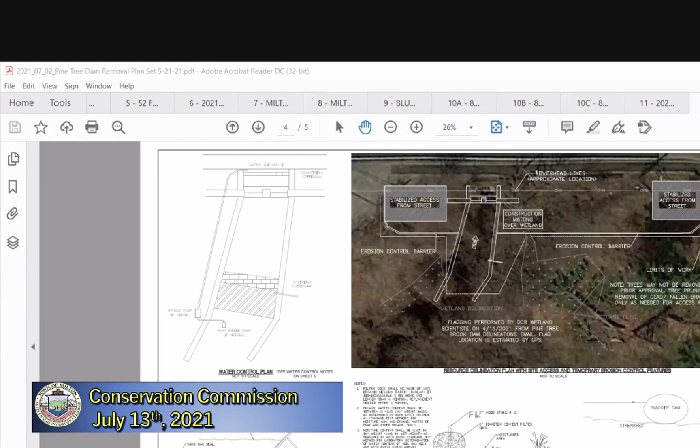In addition, because the DCR is going to contract this through state contractual mechanisms, they asked us, GZA, to put together a small plan set that would allow them to bring on a contractor, with plans and specifications defining access and the extent of the work. We've submitted those plans to the commission and would like to present them and request that the order of conditions be amended to include this. It's not an extensive set of plans, but it defines the work to be done and how it would be done under the supervision of the DCR.

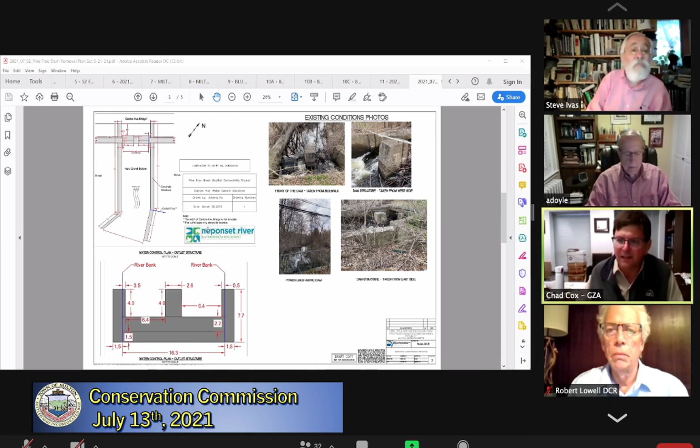I'm sharing the screen right now. Can you see that? Yes, sir, I can. Is that an appropriate place to start? Yeah, that's perfect. So the project is fundamentally unchanged since it was first brought before you. These are figures that were developed by the Neponset River Watershed Association.

This is the existing structure, and you can see some photos of it. It's really hard to call this a dam—it's more like a speed bump in the stream. With the boards out, it doesn't impound any water anymore, but it's still a barrier to the natural flow of water, and the substructure breaks up the natural stream bed and the aquatic substrate.

So we'd like to remove that. The one thing we've done is look at the structure and decide that in order to take out the bottom base slab, we want to do that while also maintaining the stability of the side walls of the channel, which we don't intend on altering. So we're going to ask the contractor to go about 1 foot in from each of the walls, inboard into the channel, and make a saw cut so that we can leave a little bit of concrete there to help stabilize those walls.

And then we'll break up the rest of the concrete, take that off-site, lawfully dispose of it, redistribute the sediment that's in the channel to backfill in the hole, and really be done with the project.

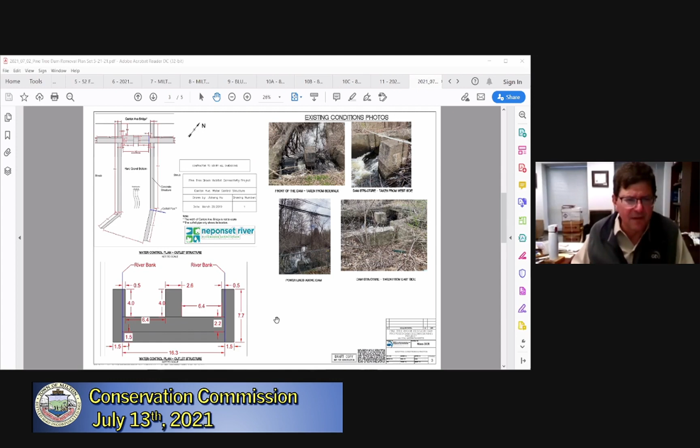And if we go to the next sheet... there we go, precisely. The photograph there with...

the white line types there just shows that we would have access from the street across the highway on both sides of the stream. And then we should be able to get in through there with just really light construction equipment on the left side, kind of as you're looking downstream, to help us break up the concrete.

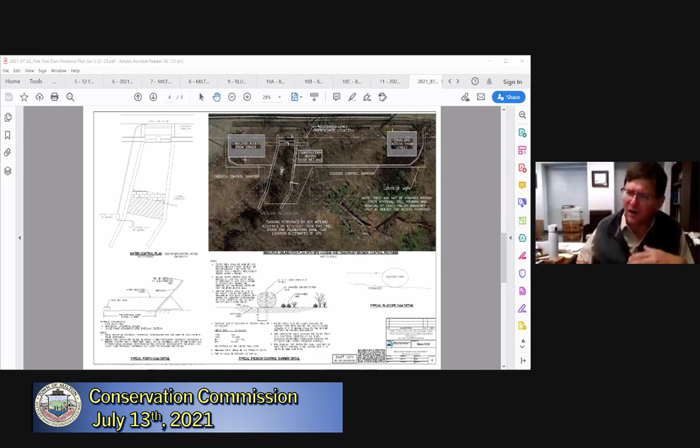One of the challenges that we have at this site is that there are overhead electric lines. So reaching in with equipment from the street or the sidewalk is problematic because we don't want to snag any of those electrical lines. So we'd like to get access from the sides.

So we've got a stabilized construction entrance on one side. We've got another one a little bit further along. That comes up and there's just a finger little bit of existing wetlands there. So we'll put some construction matting on that to make sure that we don't mess up anything there as we're temporarily accessing. There are some dead trees, some branches that we would prune, but we would expect to leave all live trees, any substantial live trees in place.

Reach in, set our water control first, because we'd like to do this work in the dry. We'd like to do it during the absolute dry season, at which point we think we can either pump the water in the stream around or perhaps even just temporarily get in and do our business. But we really feel like we're probably going to be pumping the water around, and we would do that by isolating the dam area upstream and downstream with a temporary cofferdam consisting of something that's not fill, not loose fill.

We would be allowing the contractor to select something like a porta-dam, which is the detail seen down there in the lower left, or a bladder dam, which I actually think would be pretty useful, which is the detail there in the lower right. That's just basically a big rubberized balloon that's filled with water and put across the stream, and it can do a good job of impounding several feet of water. That's really all we need.

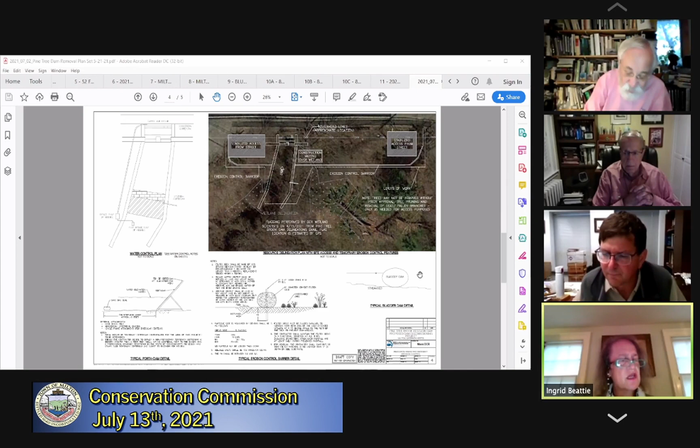Question, this is Ingrid. The photographs of the existing conditions, the one that said the caption dam structure taken from the west side — I know we've seen this site before, and I don't recall that much water going through it. It seemed like it was a whole lot less. Are these pictures taken with the boards in or all the boards out? And what time of year was that?

Yes, ma'am. My understanding is that all of the boards were out, and certainly substantially they were out. If there are any left, there's only minor boards left in. And these photos were taken earlier this year in May, I believe.

Okay, I bet if you took a look at it now, there'd be quite a bit of water going through there. Right, because of — am I remembering this incorrectly? I remember looking at this and it seemed like there was a whole lot less flow. Even when we did it, I think it was late summer. Yeah, okay, maybe that would certainly explain it. Yeah, it was quite a hot day.

And we certainly are intending to do the work. What we would like to do is do the work in absolutely the late summer, early fall, when flows are at their dead minimum. Yeah, that's what I was thinking — what's the volume of water going through there at any point in time? Okay, I understand.

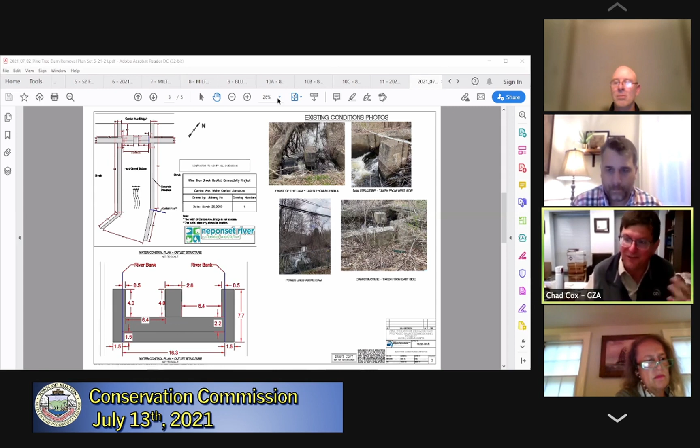I guess we would be open to something else, but we would specifically exclude both loose fill and sandbags. If I were a contractor, honestly, I'd want to put super sacks in the channel because I think that would be absolutely the easiest, but we're going to exclude that and ask for either the bladder dam or the porta dam. Perhaps somebody could come up with something clever like a steel plate on the downstream side, which might be useful for keeping the backwater out and not be fill, and be kind of easy to move in and out. We might be open to that, but we would specifically exclude both loose fill and sandbags.

Okay, perfect. Chad, I had a question for you. When we first addressed this, I guess it was actually 4 years ago now, one of the questions that came up was, when you remove the boards, what's going to be the impact on the Holland Street side going all the way back to Wollaston Golf Course? Because I know there were some questions about whether or not the ponds on the golf course would be lowered, and whether or not somebody was going to monitor that, is my memory. And I don't know whether or not it actually did lower the ponds, or if it's had any impact. Are you aware of any impact?

No, sir, I'm not. My understanding is the boards have been out for a substantial period of time. I'm sorry that I can't specifically speak to whether any monitoring's been done, but to the best of my knowledge, the DCR has not received any complaints about upstream impacts to this time.

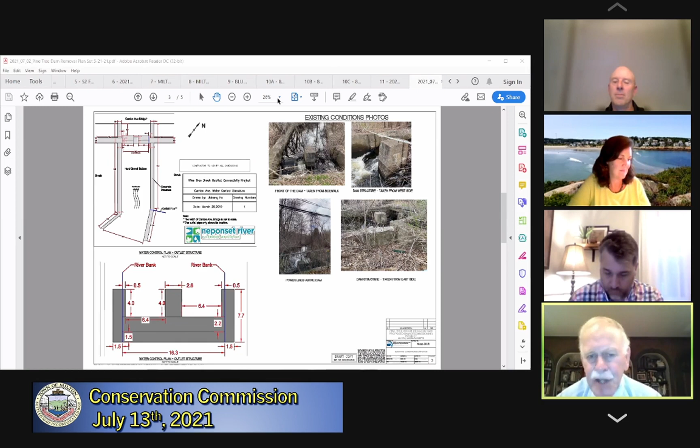Any other questions or comments? Hearing none, is there a motion to deem this to be a not significant change to the order of conditions? Aye. Thanks, Todd. Is there a second to that? Second. All right, any discussion? And all this means is it's not a significant change and we can move to, in a second motion, to approve the revisions. So the first one is been moved that it's not a significant change. That's been seconded. Is there any further discussion? Hearing none, all in favor say aye.

Aye. Aye. That's unanimous. Second motion that I'd entertain would be to issue a revised order of conditions as best summarized by Mr. Cox. And I'm hoping that Steve took notes on that. I did. As you always do. Thank you, Steve. All right, so is there a motion to make that revision to the order of conditions? So moved. Thanks, Arthur. Is there a second?

Is there any discussion about the motion that's been seconded? Hearing none, all in favor say aye. Aye. Aye. Unanimous again. Thank you very much. I appreciate it, and good luck with this, and we look forward to the completion of the project.

Thank you very much, commissioners. We appreciate it. All right, we appreciate your work. Thank you. Thank you. Have a good evening. Thank you. You take too care.

Number 3 on the agenda is notice of intent at 24 Wentworth Farm Road. And I believe this is one in which Todd Hamilton will recuse himself. Is that correct, Todd? Yes. All right, thank you very much. What's the best way? Can we, just call me on my phone, John, if you, all right, and thank you. I'll step back in. Thanks.

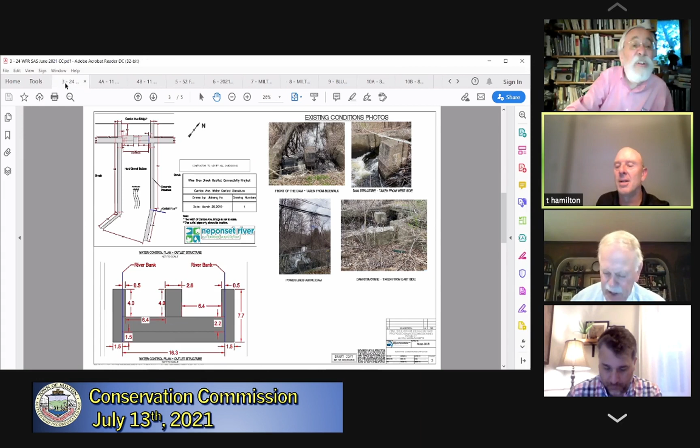Okay, you all set? Yep, we're all set to go. Hi, John. Good evening, everyone. My name is, for the record, Jeff Kane with LAL Engineering Group. I'm representing Jordan Storm for this notice of intent application for 24 Wentworth Farms Road.

We're getting to the end of the projects here. This is the last of the 2 lots that we'll be submitting notice of intents for. 24 Wentworth Farm Road is a 1.23 acre lot that's located at the end of Wentworth Farm cul-de-sac.

Steve, can you rotate that drawing at all? No, but I can zoom in. I think you can rotate in that. Yeah, can't you? I can't, I don't know how to rotate, sorry, okay, in this particular screen. Yeah, looking right there. Okay. So I can zoom in. How's that? Yeah, that's fine.

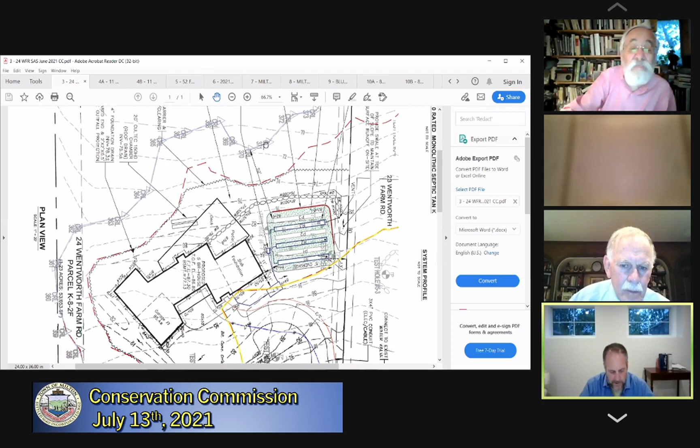That help? So the 24 has a wetland associated with the west and south portions of the parcel, as you can see in the plan here. The existing topography slopes from east to west from the cul-de-sac down to that BVW. And we'd be looking to locate or construct approximately a 4,000 square foot single family home with obviously a driveway and on-site Title V compliant septic system.

A little bit of numbers here, looking for disturbances. The proposed house, as I mentioned, is about 4,000 square feet. We'd be looking to put in about 8,400 square feet of impervious area over that entire lot. That does equate to about 16% lot coverage, which is significantly less than the zoning allowed 35% maximum. The buffer zone impacts we're looking at here is 15,000 square feet of permanent buffer zone disturbance, 5,000 of that which would be rendered impervious area.

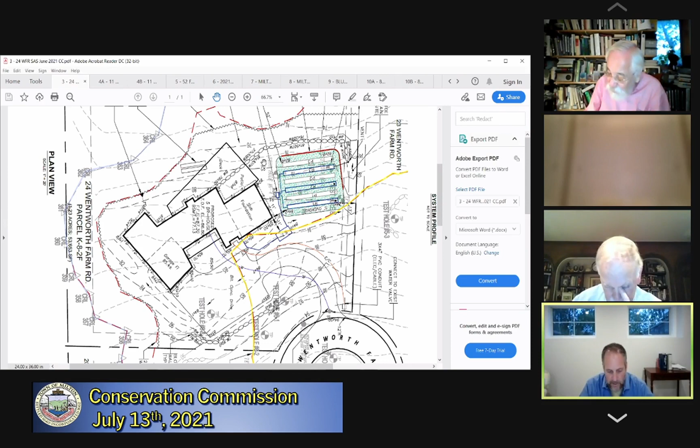All the work that we are proposing would be between the 25 and the 100 foot of the buffer zone. We are obviously respecting the 25 foot no-disturb on the parcel. And we are looking to infiltrate the first half-inch of water runoff over the roof into roof drains and into on-site infiltration galleries, which equates to the half-inch DEP stormwater quality volume.

One thing we'd like to point out is that we've mimicked, to the extent possible, what came out to about the same as the initial design we showed on the 2016 notice of intent for the subdivision. This lot always had constraints involving the topography and the way the wetlands sat, so there was only a certain size and shape house and driveway we could get on there. If you look back at the 2016 filing and the subdivision itself, you'll see that though the house shape has changed and the septic area has moved a little bit, the entire area of disturbance has really remained the same. So we tried to respect that when we did the project.

That said, as for the performance standards for the state and the town, how we've met the state standards: we're not doing any work within the actual BVW itself. We won't be doing any work within an estimated area of rare wildlife, and there'll be no work within an area of critical environmental concern.

As far as the town performance standards go, we have met the state performance standards for the first one. We are providing erosion and siltation protection during this project's duration. There will be no catch basins associated with the single family house. And the resource areas have been flagged, delineated, and just recently renewed—I think within the last few months—for the subdivision itself.

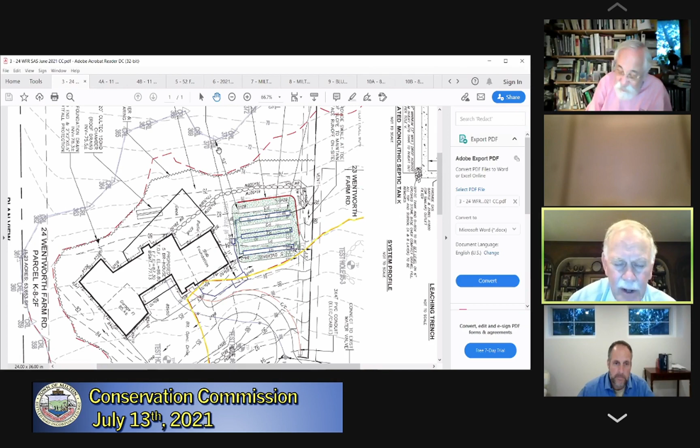I don't mean to pick on Wendy and Ingrid, but I defer to you in terms of your knowledge of shrubbery - would it be a good idea to plant shrubs along that line to maintain the demarcation? Do you have a view on that? I think it's always a great idea. I think shrubs have the natural ability of absorbing pollutants much more than lawn does, and also provide natural wildlife habitat and food and all kinds of good things.

I believe Jordan, you're on the call, right? That's right. Do you have any preference as far as putting shrubs up along that limit there? No, I mean, I would point out that that area is very wooded to begin with, so there's a lot of natural foliage and wildlife that comes up to that point. But we can certainly talk about it.

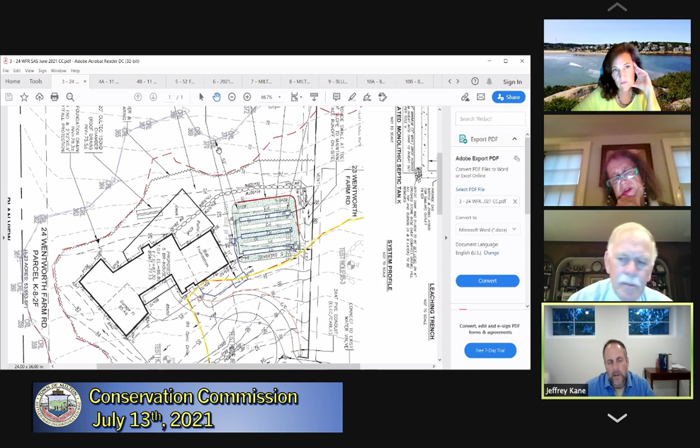This is Ingrid - what's the exposure, how much light does that area get? It's where the lot slopes back there, you're kind of coming down off of Highland, there's not a lot of light in that area. Pretty shady - that's what I was wondering. But that said, you've got the house going in, so I think that's going to change a little bit. Right, but you're not going to get full sun there, you're going to get a mix - not full sun, but definitely not full shade either.

So there's the north arrow right there. Okay, right, so you can see it's got a westerly-southerly exposure, except for early morning when the house higher in elevation would take care of that, because you're at kind of the bottom of a hill there, obviously with the wetlands right there. So there's not quite the amount of sun you're going to get on a typical southern exposure because you don't have all cleared land behind you.

My only reason for bringing it up is that, for the applicant's benefit, Mr. Strom, we sometimes are confronted with landscape lawn creep. It tends to go further and further towards the wetlands and sometimes into the wetlands. That's why I brought up the question, but I thought Wendy and Ingrid would have some view, and I didn't mean to exclude Arthur, Hans, and Todd as well. What's your view on planting some shrubs? Whether or not they'd survive is a good point, Ingrid, regarding what the exposure is. I don't know whether they would even survive if we asked the applicant to plant some shrubs along there, just to maintain that line.

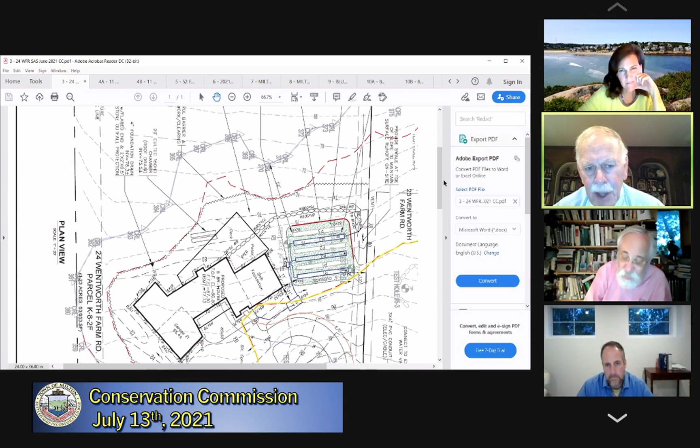Have we required this for any other property? Yes, we have, but not in this specific subdivision - it was other properties, Hans. So how many of the other houses in the subdivision have been constructed already? One's been fully constructed, and there are 3 or 4 under construction right now. The shrubs haven't been specified.

I am aware of your concern with the creep, as you call it, John. I want to mention that flat area - usually the creep involves usable lawn. Talking with the owner, Jordan, he wanted an area for the kids to play that was flat. The area behind the house isn't really conducive to that, that's why we had that flat area over the septic system, which is a decent size. We have a retaining wall that allows that to be a more flat, usable play space. I think the area behind there is more of a gateway up to the end of the property, less an area that's going to be utilized for useful activities.

I would agree with that, Jeff. It drops quite rapidly down to a stone wall - is that correct, as I remember? On the backside there is a stone wall, not on that side. Yeah, and there's one there as well. You're going to see that one on the western side, right? Exactly. So in this one here, this lot itself really hasn't changed a lot since day one because we knew it had some issues with it.

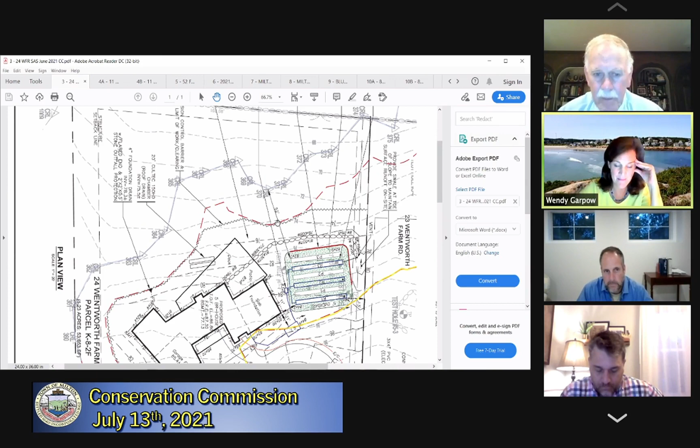I love the idea of the shrubs, John, and I think you're absolutely right drawing from the experience with the other property you mentioned. I don't think there's any harm in having some kind of delineation just to prevent the possibility of lawn creep. No, I absolutely agree. Something native, like blueberries, hopefully the homeowner would be amenable to something like that. It's certainly also a perk for kids, a fun thing to do - a low, intermittent hedge that demarcates the line. Does that make sense?

I would agree entirely, Ingrid. I don't think the blueberries are gonna last long. Well, that's the reason I asked the question in terms of exposure - how much light, and is there enough light there to sustain something like that? Yeah, I'd just be more concerned with the deer.

That too, and birds for the blueberries frankly. If they're native wild blueberries, they're less susceptible to being devastated by deer, and they do relatively well in shady areas at times, more so than the cultivated ones for sure. Now, you can't do anything cultivated with the deer in that area.

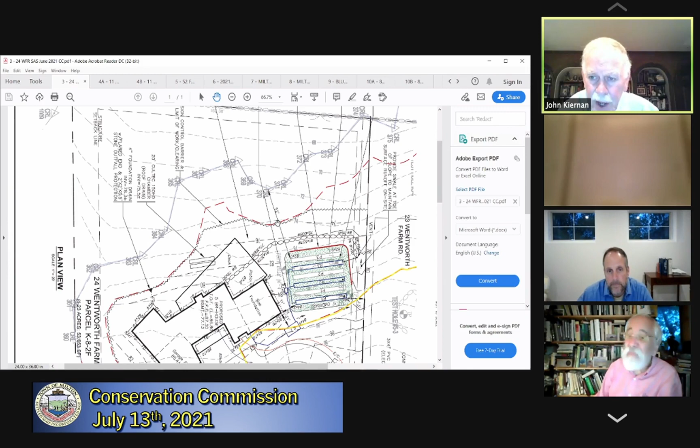I'm going to have to defer to others on 20 feet, 15 feet, 25 feet. I'm not hung up on how far apart they are, but I think it could be done in such a way that it beautifies the area or protects the resource. I think this is an opportunity to make everybody happy. I just don't have the exact number in mind. If anybody could help me out, 20 feet is okay with me. If somebody said 15, I'd be okay. If somebody said 25, I'd be okay with it.

Steve, do you have any experience in terms of the distance apart? Well, if it's 20 feet apart, if indeed the shrubs continue to grow in that area, you won't be able to see them. However, if things are mowed or deer chewed, you'll be able to see them very easily at 20 feet apart.

It depends on how well the forest grows back in, John. Looking at that spot recently, it looks like it's not a high nutrient area, so things will probably not grow in very fast. That's my guess. Would you agree with that, Jeff?

If it's a native plant and it gets the light it needs, it will grow in. Oh yes, the natives will, but not right now. Nothing else will grow besides those specific plants. So what I'm saying is the deer will be able to find them if they go after them. Deer don't go after arrowwood very much, nor do they go after the sweet pepper bush very much either.

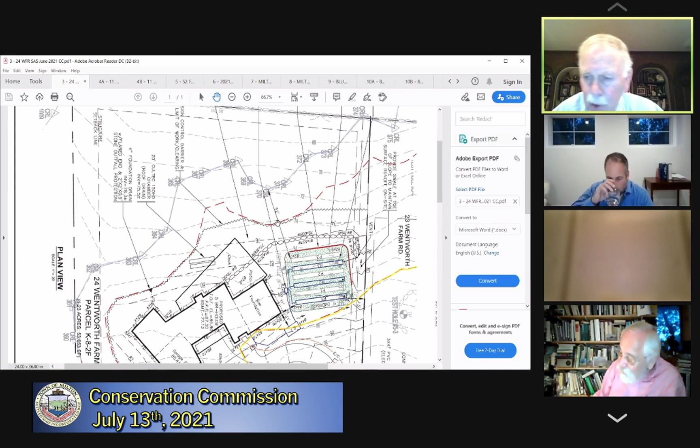Hearing none, is there a motion to issue an order of conditions with the special conditions of the plantings along the 25-foot demarcation with a maximum dispersement of 20 feet, and the planting shall be native species of shrubbery. Did I summarize that correctly? Yes, so moved. Second. Is there any discussion? Hearing none, all in favor, say aye. Aye. Aye. Good. Thank you.

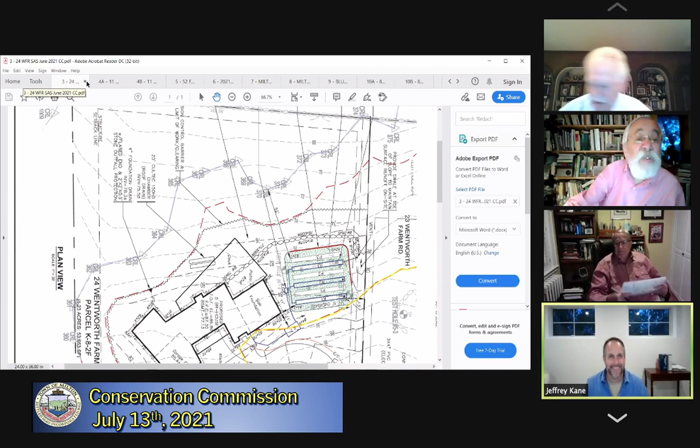Thanks all, nice presentation as usual, Jeff. Thank you, very well done document. Don't say it too soon, Arthur, he's got another one coming up. Keep that thought, Arthur, keep it. I take them one at a time, Steve. Exactly, okay, there you go.

All right, number 4 on the agenda is amendment of order of conditions, 11 Wentworth Farm.

Let me just jump on that one, 11 Wentworth Farm. Jeff, I have the original up, and I can show the other one as well. Would you like to see any particular one? Original, maybe? No, I think we just start. Let me just—I'm sure you guys read the letter, but I'll just give you a quick synopsis.

We received an order of conditions for this lot, 11 Wentworth Farm Road, with the intent the owner was going to build a spec house. In the interim, that lot was sold. The new owners want to put up a house with a slightly different footprint. As we outlined in the letter, the disturbances on the lot, nothing really changes. The house shape got squeezed down and extended forward.

If you look at the original to the new one, it's really the same square footage, just a slightly different shape. As far as the jurisdictional area goes, the disturbances are almost the same. It's just the impervious area has gotten a little bit less. Beyond that, everything else is the same.

We felt instead of just doing this as an as-built—and no one probably ever would have noticed the change in footprint—since this was a new owner, we wanted to have some type of permit in place that let him say, hey, you have the right to go forward with conservation to do this. So we wanted to put through a request to amend the order of conditions, so we'll have the actual site plan with the actual building footprint on it.

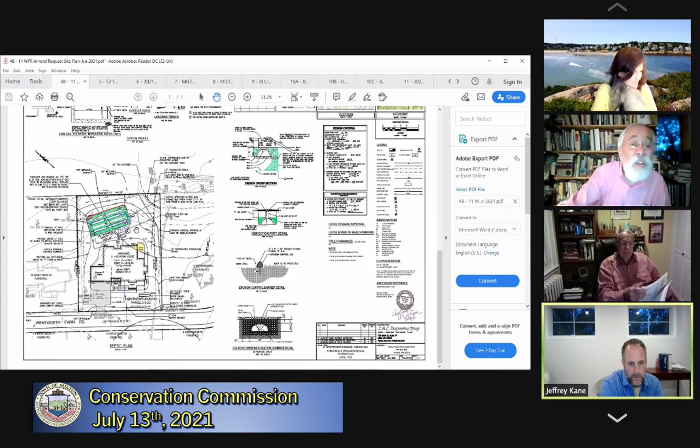So if there's any questions, let's show the original versus the new plan. You can see that highlighted area, the concrete patio, right there. I'll zoom in on it a little more.

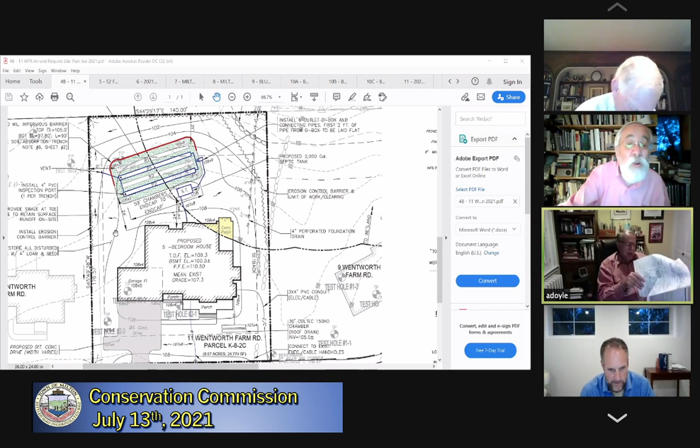Is that the new one? I thought I had another one up called 4A. Let me scroll down to see the date on the drawing. On the original plan, the concrete patio was much larger, and the house footprint was longer and a little narrower.

On the proposed one, it's not quite as long but a little fatter, and the concrete patio actually gets a little bit smaller.

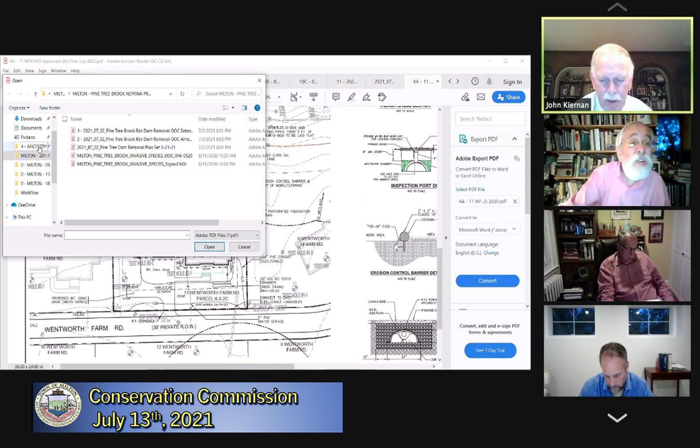This would require two votes: one as to whether or not it's a significant change. If it is, it would require another notice of intent. If not, we could then consider whether to approve the revisions.

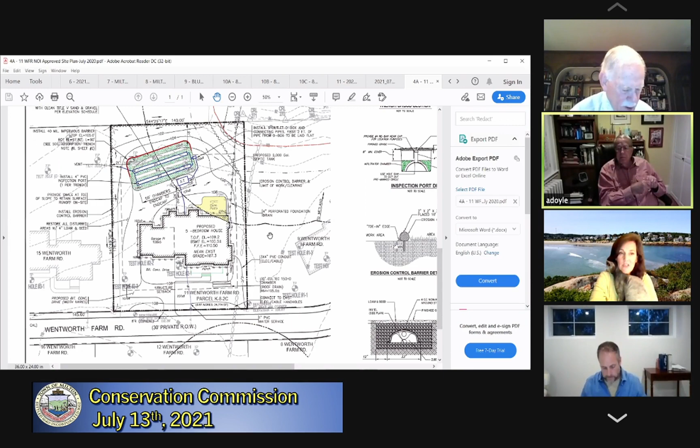It seems to me that you've reduced the impervious surface, correct? Yes, that's right, John, by about 200 square feet. And it also looks like you've taken a piece of the structure out of the buffer. Yeah, just a little bit, but that impervious area does change, be it roof or concrete.

I don't see this as a significant change. Nor do I, but I don't know whether anybody else does. Arthur, did you have a question? No, I was just saying I agree with John.

Are there abutters or members of the public who have a question or wish to make a statement? Hearing none, is there a motion — remember, we've got two motions. The first would be that this be deemed not a significant revision. So moved.

Is there a second? Second. Any discussion on this? Hearing none, all in favor say aye, meaning it would be not a significant change. Aye. That was a unanimous vote.

The next vote would be whether to adopt the revision as the applicant has requested. Is there a motion to accept these revisions? So moved. Is there a second? Second. Any discussion? Hearing none, all in favor say aye. Aye.

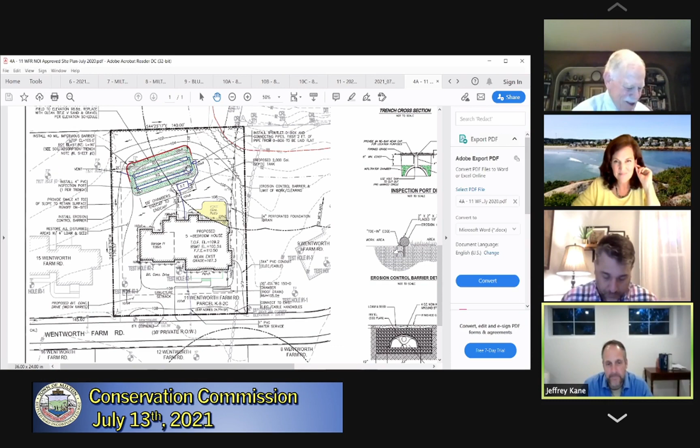All right, but wait, there's more. Next on the agenda is number 5, request for certificate of compliance at 52 Ford Ranch Road.

But before you start on that, let me just reach out for Todd if I can. I'm back. Oh, you're back. There you are. Thanks.

52 Ford Ranch Road, is that Jeff? We've got you again. Yeah, that's me again, John. This one's pretty straightforward. We had a septic system repair at 52 Ford Ranch. I don't know if you remember that walkthrough, a real tight site behind the house, right up against the wetlands.

Failed septic system — we put in a new alternative technology septic system, supposed to provide advanced treatment of that effluent being so close to the wetland. At this point, we're just looking for a certificate of compliance. There was no new disturbance area, just a regrading of the lawn that was already there and replacement of the system. We did place, as you'll notice on the plan, some shrubbery along the edge of that wetland, per a prior request.

Those were all put in, pretty much grouped as they appear on the drawing. The landscaper just followed what was there and put them in the same groupings. So we're just looking to get the certificate of compliance and close out the project.

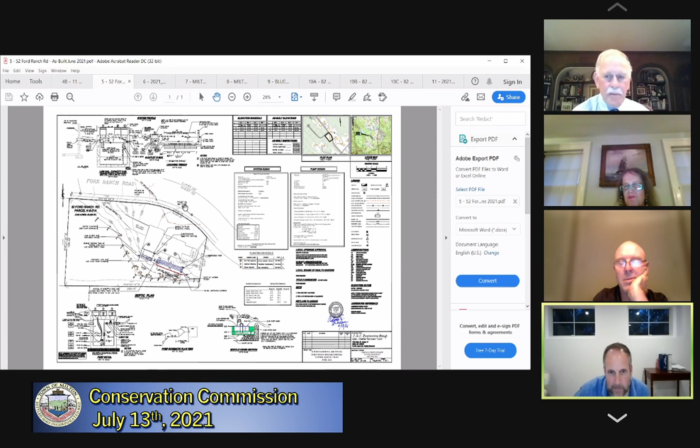All right, how long have they been in the ground? The shrubbery I'm referring to, Jeff. It was this spring, John, was that? Let me see, I think they put them in last year, just trying to remember. Yeah, if it was spring, or we went out there in November. I get these as-builts running together. Right up there, Steve, there's an as-built inspections date, if you go up there you'll see it. Okay, hang on a sec.

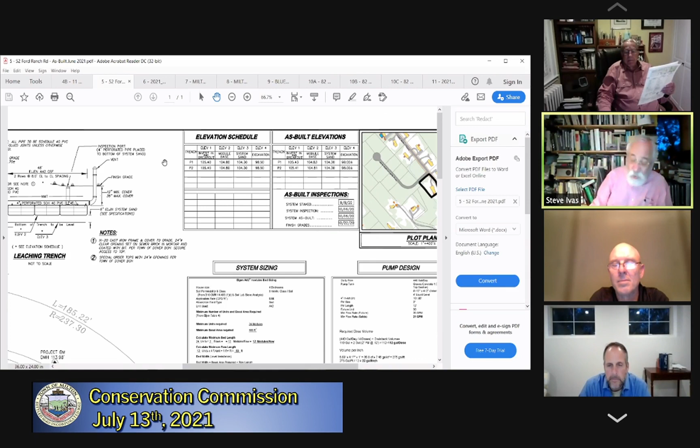The grass was in last fall. Yes, it was, I drove by about three weeks ago and it really looked good. So I think they were probably put in, and we inspected them in October, though it was probably put in like September or August when they were actually planted. It looked good, very good. Yeah, it's so lush back there, it's so close to the wetlands. I won't call it a river because we never determined what it was, but it's so close to that. It's just a great spot for growing, and they're doing great.

All right, and for the record, we do have the certification that the work was completed in substantial compliance with the plans, which is critical for us. Are there any questions or comments from commissioners? Are there any comments or questions from abutters or members of the public? Hearing none, is there a motion to issue a certificate of compliance?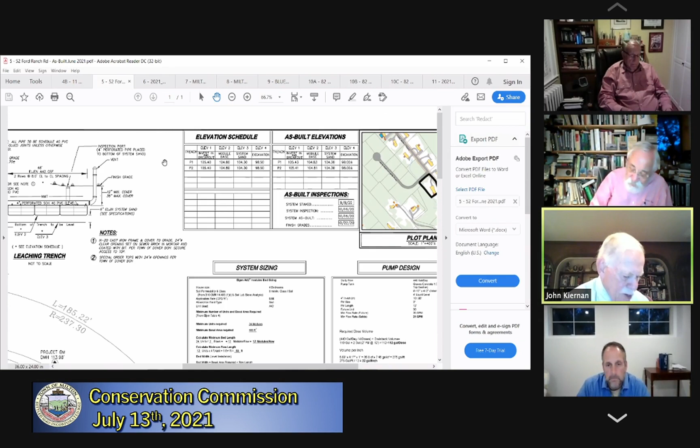I'll move to issue the certificate of compliance. Thank you, Arthur. I'll second it. Any discussion? Hearing none, all in favor say aye. Aye, aye, aye. Great, thank you very much.

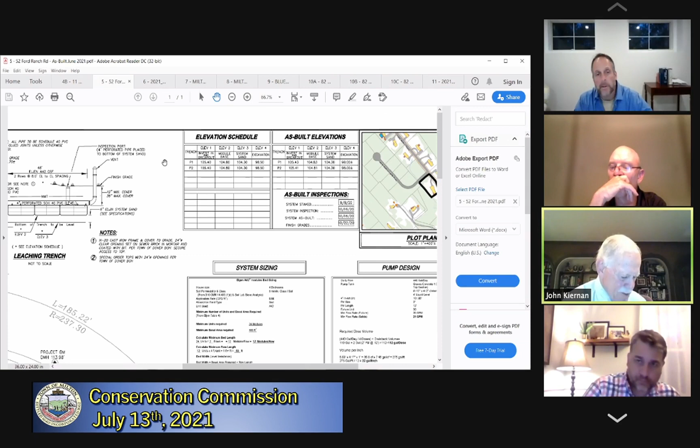Ladies and gentlemen, thank you very much for your time as always. Take care. Oh good, thanks. Take care. Thank you, Jeff.

Okay, next on the agenda is number 6, notice of intent for 101 Neponset Valley Parkway.

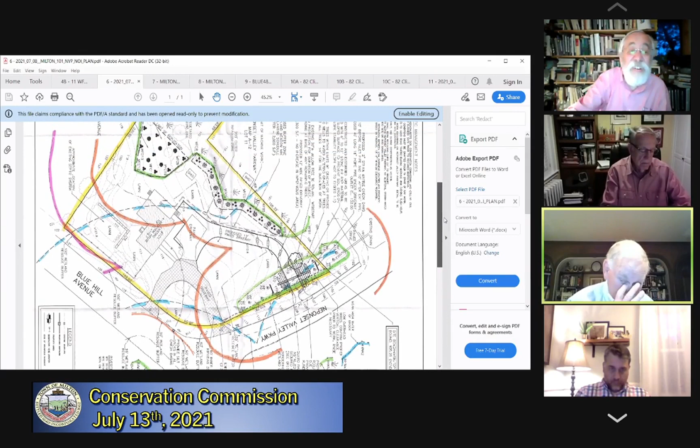Good evening, can you guys hear me tonight? Yes, thank you, good evening. How are we? Do you want me to give an intro? If you could give us an intro, that'd be great. For the record, my name is Peter Lyons with Collins Civil Engineering Group. I'm on tonight with the property owner, Mr. Niels Krejci, regarding a driveway relocation project. I believe most of the commission is familiar with the project, we walked it maybe a month or two ago.

The main purpose of the project is to eliminate the existing driveway at the intersection of Neponset Valley Parkway and Blue Hill Avenue. I think anyone who's been there will agree it's a very dangerous intersection, not only for whoever's at the house, but for whoever's trying to navigate the intersection. There's very commonly traffic jams there, so it's a major safety concern. That's our basis for this project.

So what we're contending with is sort of a wetland created by the drainage system of the Neponset Valley Parkway. It's pretty much intercepting the groundwater and running it off towards the north, I guess, which would be to the right on this page. To the right would be west, I think, just a guess, but let's take a look. To the north, you're right. Here we go. Okay, Peter, you're right.

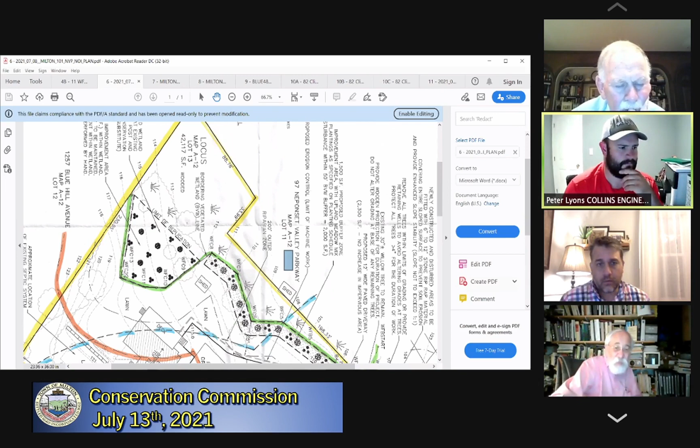Well, I don't know, just brainstorming here. It looks like it's doable. But you have to get the hydrology to cooperate. Exactly. But that whole connection between C6 and C12 or C10 might work.

All right, well, again, it's my view that we don't really have the discretion that you're looking for unless we get some kind of replication and creation of new wetlands. But we support the project. I know the driveway in its current location looks like a disaster waiting to happen. So we'll continue to work with you, but I think you've got to put it into an area where we can exercise that discretion to support the plan.

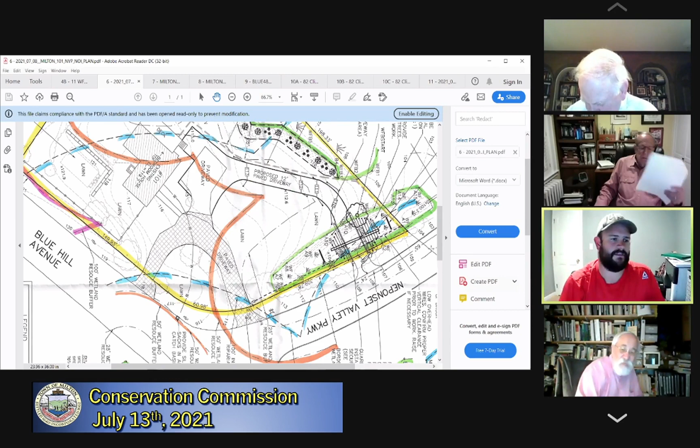Sure, I understand. So just to verify a couple numbers before we go on. I'm running over some new numbers, and because we're getting rid of the old driveway, we're ending up with a net increase of about 1,500 square feet of impervious area. So are we more concerned with the area change on the driveway, or am I looking to replicate strictly the wetlands that are being altered?

Oh, what I was referring to was the limited project aspect of it, where you've got to replicate as long as it's less than 5,000 square feet. You can consider this a limited project, but you do have to replace the wetlands. So I was not looking at the impervious surface net increase.

I don't know if DEP would consider this a limited project. I think it really might be. Why wouldn't it be? It's under 5,000 square feet. Right, but you're crossing the wetland. But there's existing access, so...

Limited project does require alternatives analysis. However, if the alternative is a less safe driveway entrance, I think DEP would go for it. There's obviously public safety involved here, Hans. Sure, and I fully agree with that. I'm just questioning whether it specifically qualifies under the limited project. But if it's under 5,000, that's fine. It's just a matter of trying to find a way to replicate the wetland impact itself in a way that'll pass muster.

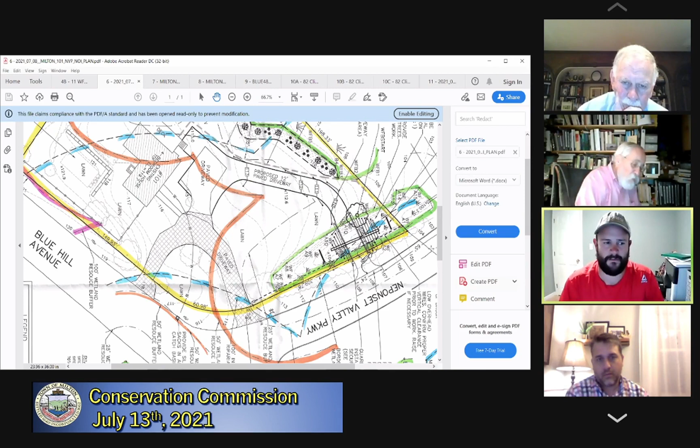Okay, so we have about 1,000 square feet of wetland impact, including the driveway and the extents of the grading. So if the commission approves a replication ratio, have we talked any replication ratio numbers? Are we doing 1-to-1, or what would the commission like to see for this project?

Well, my view is that would be the minimum that we would require. It would be 1-to-1. And with respect to the larger impervious surface, you can address that. If there's a runoff issue, you can use tech chambers to slow it down somewhere.

That, to me, is a completely different issue. I'm hung up on the wetlands that are being lost. And if it's not 2,300 that we're losing, if it's 1,000, then I think it makes it even more doable. Yes, agreed. So that's the focus in going back and doing the redesign, Peter.

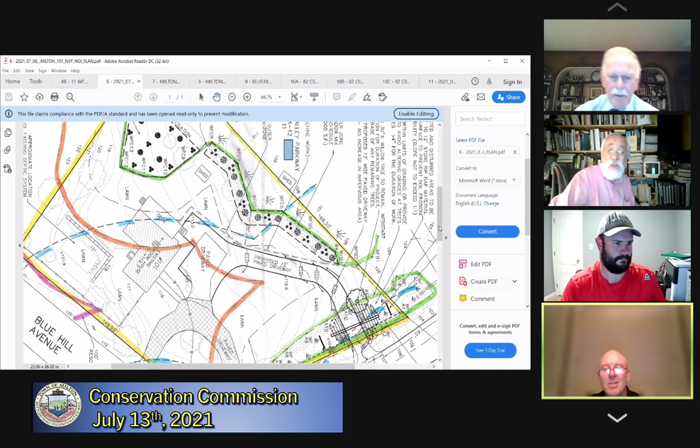Okay, in my opinion, just a suggestion, Steve - right along where he wants to put the proposed pipe and driveway across, why couldn't, where it says lawn, we replicate right there, right against it?

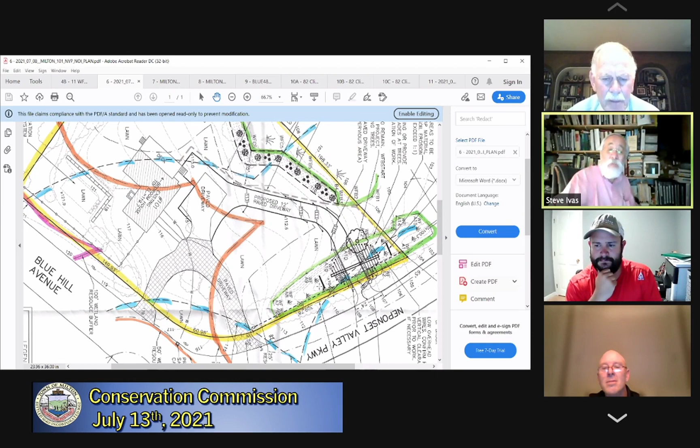He'd have to go down quite a bit in elevation. He'd have to take a lot of fill out there, that's a lot. So every foot you go down, you've got to go 4 feet in the other direction, or 3 feet.

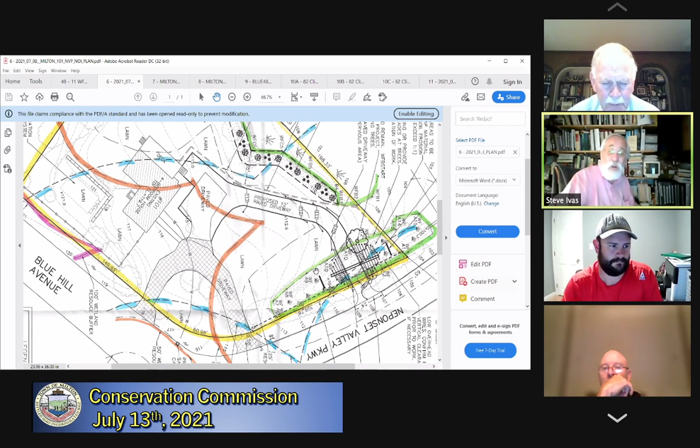But up further behind the house is higher than there. Yes, it is. That's why I would never go there. What I was talking about would be the easiest - replicate right against it. Take the lawn out and put it right there.

Well, that's a possibility. The other consideration that needs to be accounted for is the hydrology - the likelihood of success. And so in terms of creating new wetland, you want to try and attach it to a larger wetland system. Trying to expand the isolated wetland, I think, would be a bit more of a challenge. Yeah, connecting it, I think we're better off.

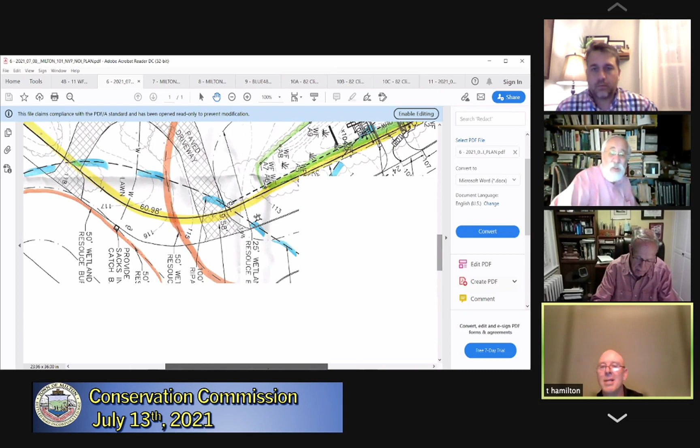Better off how? Well, it's better off down at the lower point than it is up at the higher point, in the backyard or the side yard, as long as you intersect the hydrology. That's the issue right there. You've got 1, 2, 3, 4, 5, 6 feet at least that you've got to address there.

Going down 6 feet at a 3-to-1 slope, you've got to be 18 feet over here. The further you go back, the higher it gets. So you might have to go way over here into the lawn.

This is 25 feet. This line right here is 25 feet from here, right? So you might be taking up most of this. If you took that out, or if you went into the old driveway where it's paved now and took some of that out.

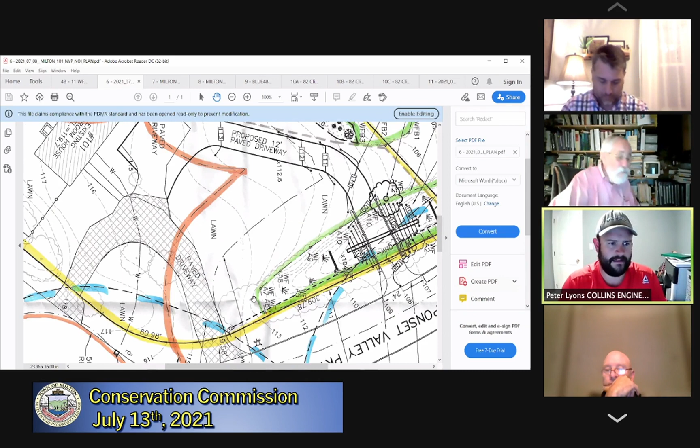Can I just speak to that quickly? I agree. I think that area is really just too much slope to work with, and it's relatively stable already, and it's a big slope to go tearing up.

The 10-foot strip where we're talking about putting some plantings is 1,300 square feet, which is already greater than our 1,000 square foot wetland encroachment requirement. So if we circle back to that, that's going to be much easier construction with a much better likelihood of success, because we're not stripping out 6 feet of material. We're taking out a foot or two.

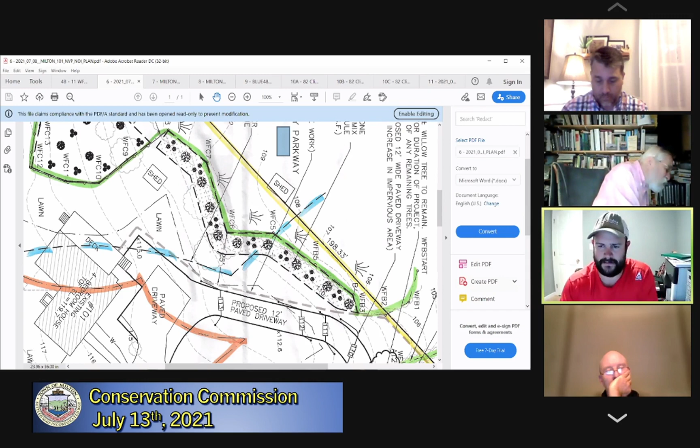The groundwater is not level. It's about 12 to 18 inches down across the whole site. So just because it's uphill, you see to the west that the wetlands creep right up the contours. We're not going to have to do too much in that area to make it a viable wetland area.

So that should be the focus of the replication area. And I really think we should leave as much of that drainage ditch itself alone - we're already going to be impeding it with the driveway crossing. I don't feel it's appropriate to rip up the vegetation that's currently stabilized and already established there.

If the commission has any insight on that - well, my reaction is it sounds reasonable. You're just extending the wetland line out by, what, 10 feet? And if you can make your 1,000 feet there, or 1,300 feet there, that makes sense to me.

We should be able to meet even 150%, I think that's very doable. We don't really want to move the shed or encroach too much into the lawn, but I don't see why we couldn't bring the wetland right up to the back of the shed almost, and gain ourselves some extra space there. So that's the way we would like to proceed.

This makes much sense to me because I've seen instances before where, with something of this nature, not exactly the same, the wetland is ultimately going to creep anyhow. There's going to be erosion over time, and the wetland's force is going to be stronger than what gets planted.

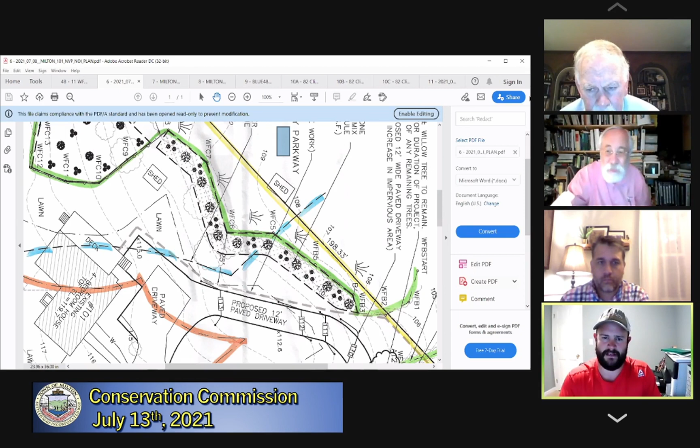Do we have a second to take a look at the proposed wetland plantings, and basically what we're proposing in that triangle piece - we would probably use the same right up through the strip. So if the commission's okay with those, we'd like to stick with those through the project.

I don't remember. Do you remember, Peter? I don't, honestly. I've been at 200 places since then. Right, I do not recall. I think it's in the letter of September 27th, 2017. Gives a list of what's there. One of the last things in the packet.

And let us know, Ingrid. So looks like red maple, white oak, white pine, spice bush, honeysuckle, buckthorn, high bush blueberry, bittersweet.

So far, the one thing you've said is a wetland plant is spice bush, northern spice bush. Yep, and then there's some things that we don't want there, like poison ivy and purple loosestrife, and the bittersweet. Poison ivy is a native, it has high wildlife value, I must remind you. That's right. So spice bush is a good addition, really.

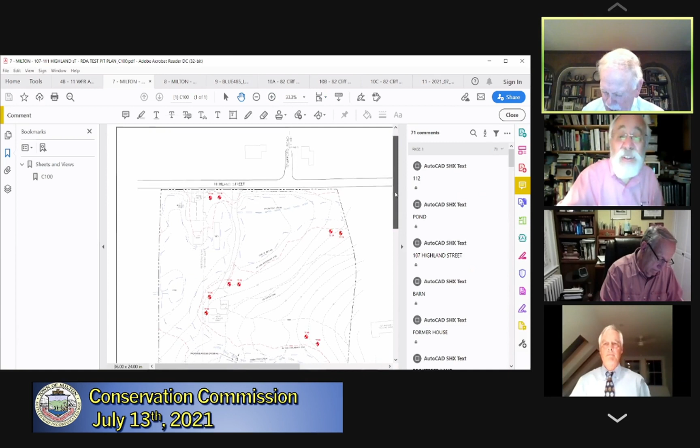Now we have a request for determination of applicability, 107 through 111 Highland Street. And then I guess that is the abbreviated notice of resource area delineation, 107, 111 Highland Street. So at some point they're gonna get joined, I think. Well, perhaps. Shall I begin or further introductory comments? And what do we have on the screen, Steve?

That's the request for determination. Okay, all right, so, okay, sure, we should take them as a matter of formality. The first one on the agenda is request for determination of applicability, 107, 111 Highland Street. So by all means, proceed.

Okay, my name is Paul Avery with Oak Consulting Group on behalf of Northbridge. And what we have here on the screen is a plan that shows that we would like to excavate a series of test pits for the purpose of looking at soil conditions and depth of groundwater in support of designing stormwater best management practices for an emerging project on this property.

The locations are shown with the red squares here. A couple of them are right along Highland Street, and we move inward from there.

None of the test pit locations is within the 25-foot no disturbance zone, but almost all of them are within the 100-foot buffer zone. Thus, we are before you with a request for determination of applicability.

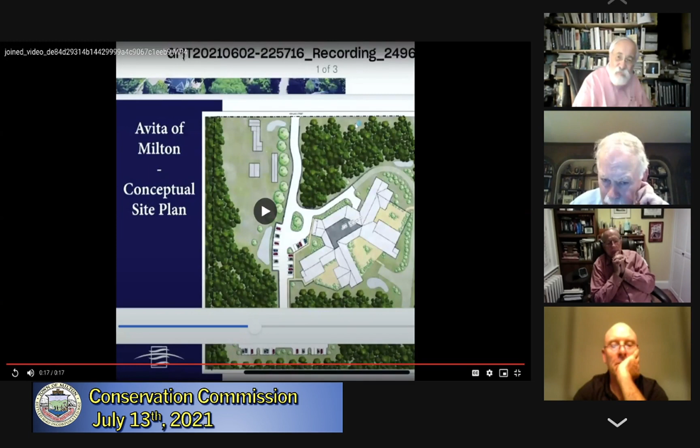That was a very short video from one of the neighborhood planning sessions, and the neighbors are delighted that Avita has hosted these sessions. But the takeaway was that 40% of the land is not actually going to be buildable. The hospital sold or marketed the land as one parcel. It is the hope of the neighbors that, if this building proceeds as proposed, the 40% not built on will be put into conservation, which is what Avita did at their Needham property, as Jim just mentioned in the video.

So that's video 1, and we're just waiting for video 2 now, which will show us the downstream impact of the water flow from the Highland Street property.

That's the one. So if any of you have been to Winter Valley before, you'll probably recognize this property. This is along the old Olmsted Garden, but you can see it's 30 feet wide, this sort of river flowing down. The watershed pulling water down Highland Street runs through the Zero Highland Street property and along through Winter Valley, then down to Canton Avenue.

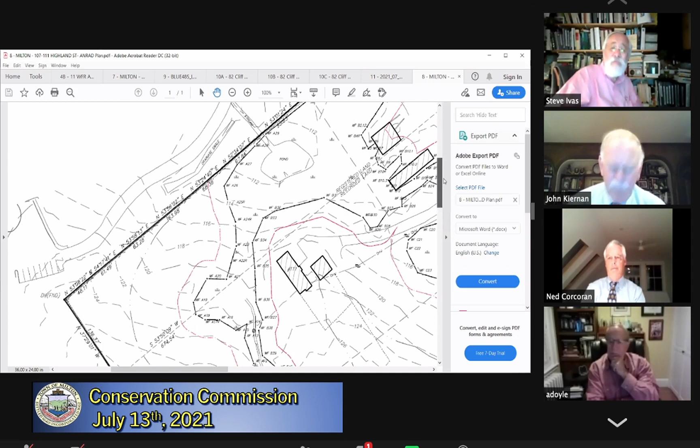Mr. Chairman, can we please take a few minutes to explain what an ANRAD is versus a notice of intent and what we're supposed to be talking about here? We understand there's a project coming, and Ned has given us some insight on it, but the intent for tonight is to get an understanding of the wetland delineation and the wetlands out there, which I don't even believe has started yet. We understand there are concerns about the project, but we need to follow the process here, so I'm wondering if we can get back to the actual ANRAD discussion.

I think the sense is that these have been joined during our discussion, that 7 and 8 were both joined, and it's my understanding we're going to continue this until Saturday morning at 9 o'clock so we can see it firsthand. It's the only way to find out where the test sites are for the RDA and where the flags are for the ANRAD.

So it was my thought that we had ended the discussion. I think the neighbors and abutters, your point is well taken, Hans, but I think we're at a point now where we can continue the hearing until Saturday morning, unless I'm missing something. I don't think there's any benefit to further discussion because we haven't seen the flags or the location of where the test pits are designed to go.

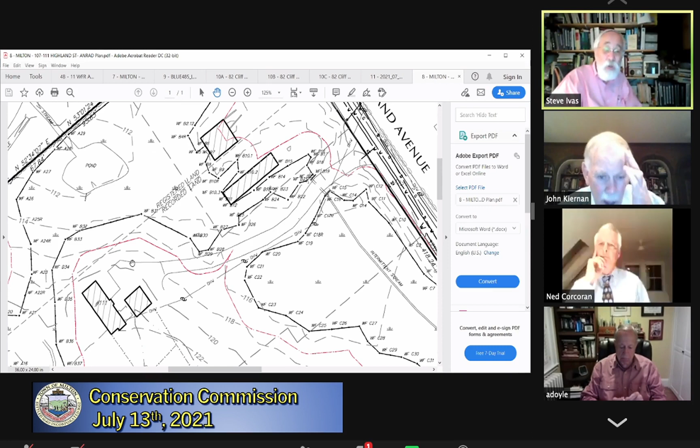There's a driveway that comes down a steep slope there. This driveway doesn't offer very much place to turn around. You can park on it, but you'd have to back around. There's not a really good area here.

Fair enough. We still have quite a bit left on our agenda this evening, so unless there are further questions or comments from commissioners, the abutters, or members of the public, I suggest we continue this matter until Saturday morning at 9 o'clock, and we will meet at 107 Highland Street.

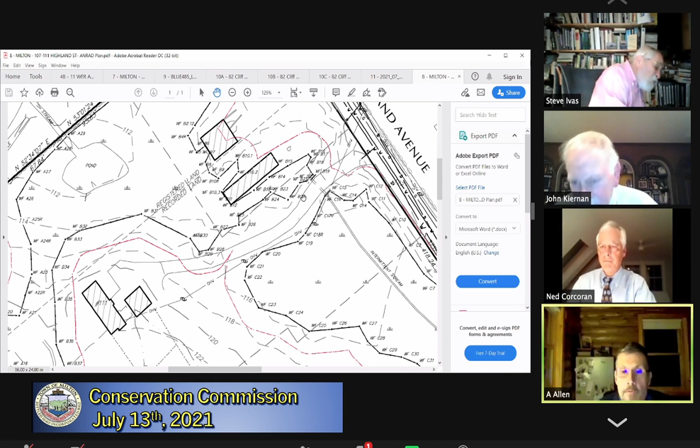If I could, just briefly, this is Arthur Allen from EcoTec. I prepared and filed the abbreviated notice of resource area delineation, ANRAD. I also did the delineations of the site both in 2018 and most recently this last month of June.

Just wanted to clarify quickly, there's a lot of discussion about water on the site, especially as we're nearing a record amount of rainfall in July. So basically, just so you know, I flagged the bordering vegetated wetlands on this site. Apparently there's flooding, excess water that appears to be part of a flood event outside of the wetland boundaries. It does not necessarily make the wetland boundaries invalid. The flood zones are always outside of the wetland, so they extend outside of the wetlands. Just keep that in mind as we move forward. There may be additional resource areas associated with the flood zones out there, but that's not what I delineated. Thank you.

Oh, thank you, Mr. Allen. I appreciate your comments.

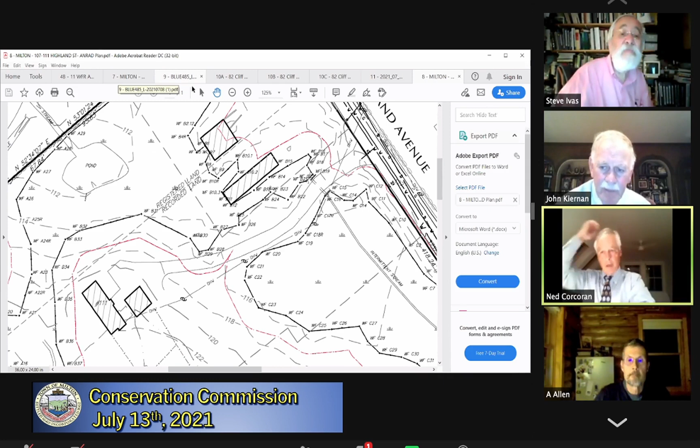Thanks, Art. No problem. The next on the agenda is notice of intent, 485, 487 Blue Hill Parkway.

Mr. Kiernan, good evening, this is Adam Brodsky. Can you hear me, sir? Yes, sir, I can. Good evening, Adam. Good evening, everyone. I'm an environmental and land use lawyer with Drohan, Tocchio, and Morgan, and I represent the applicant. With me this evening are Paul Driscoll on behalf of 485, 487 BHP Trust LLC, Michael Joyce, our professional engineer with Joyce Consulting, John Zimmer, our professional wetland scientist with South River, and Katya Podsiadlo, our landscape architect with Verdant. We're here to present our updated site plans and landscape plans for your review.

The Zoning Board of Appeals has reviewed these plans and has no further changes to propose. We're planning on meeting with them again, I believe next week, to discuss waivers and conditions for approval of the project. It's been a late night, so I'll keep my remarks brief, and with your permission, simply hand this over to Mike Joyce to explain. He's prepared to share his screen and take you through the plans, but I'll leave it to your discretion whether you want Mr. Ivas to control the screen or Mike.

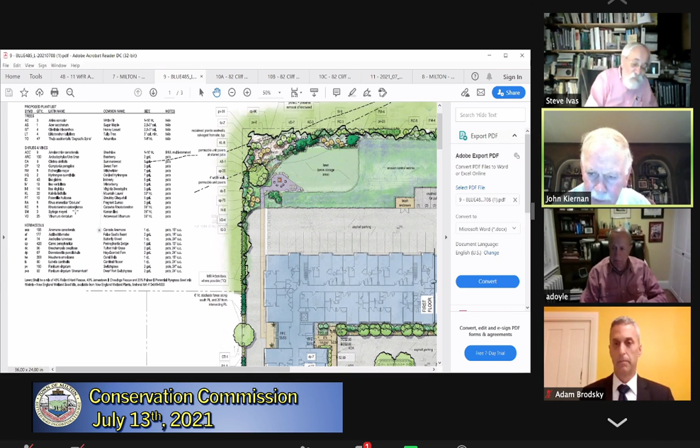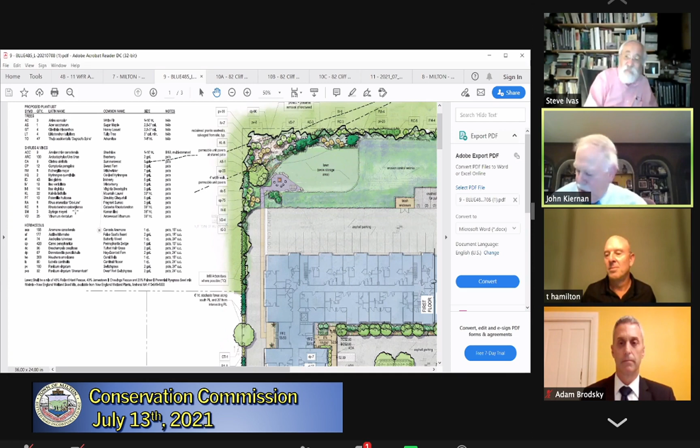Probably be better if I recuse myself. All right, it is actually for good reasons, their personal relationships with the applicant going back many years, which is a good thing. So thank you very much. If you do wish to recuse yourself, we will continue in your absence and call you back because we'd like you to come back for the next two items on the agenda. All right, just give me a call, John. Thanks, sir.

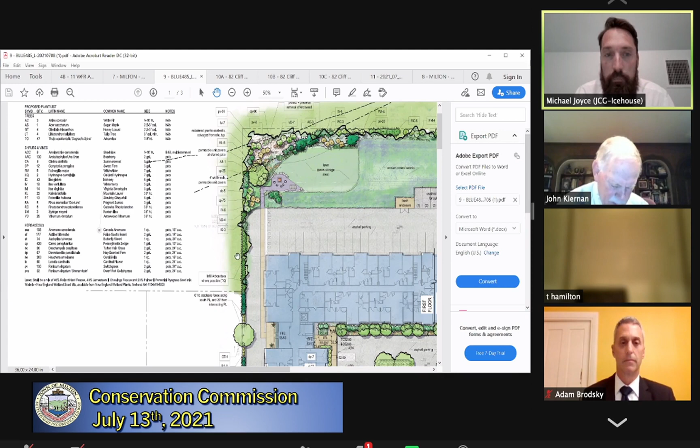Hello, I'm Michael Joyce with Joyce Consulting Group, civil engineer for the project. Steve, I don't know if you prefer that I share my screen or if you'd just rather I work off this plan, whatever's easier for you. I have some updated civil site plans that we hadn't submitted up to this point that I could share, or the landscape plans based off of those plans, so I could work off that as well.

We have not seen those plans, Michael, so it would be very useful if you could share your screen. Okay, we don't have plans in hand.

All right, am I all set up to share? Sean? Yep, Sean, can you elevate Michael Joyce? Can you see the screen? We can see a screen. Can you see my screen? You see a civil site plan? Yes. Okay, great.

Okay, so let's go back to the start, and I'll try to keep this brief. I just want to give you the rundown of what we've done, meeting with the zoning board, the changes that have been made, and also the changes we've made to incorporate the comments we've heard from the Conservation Commission to this point. Primarily, the existing conditions plan is more or less the same.

We've updated to include some additional site trees, and we've also expanded the topography outside of the property line — prior plan had it more or less to the property line. We've expanded it outside of the property line in order to make sure that our design interacts with the abutting properties appropriately.

So in addition, as you know, the wetlands have been flagged by John Zimmer, professional wetland scientist, who's with us tonight and can answer any questions regarding the wetland flagging or resource areas.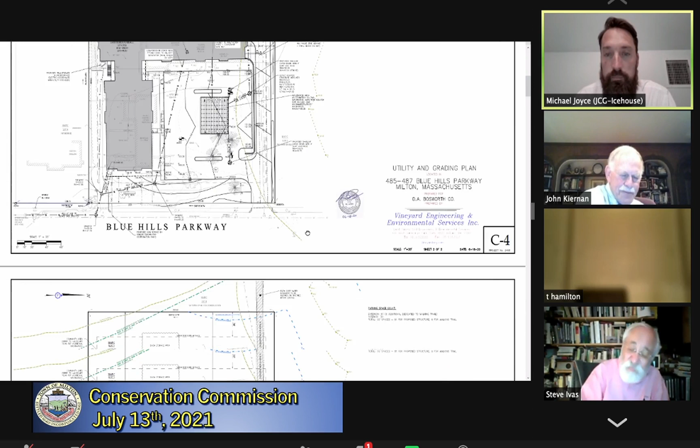After much discussion and back and forth with the zoning board and the peer reviewers — we had peer reviewers from an architectural standpoint, civil engineering, and traffic as we went through the zoning board — this is the site layout that we ended up agreeing upon.

I think one of the concerns that the Conservation Commission had brought up early on was the number of parking spaces. In order to address that, we added some parking spaces to the rear here. In addition, originally our 6 spaces for the trail area were a concern, as it was thought those would be used by residents. We've put those off and isolated them.

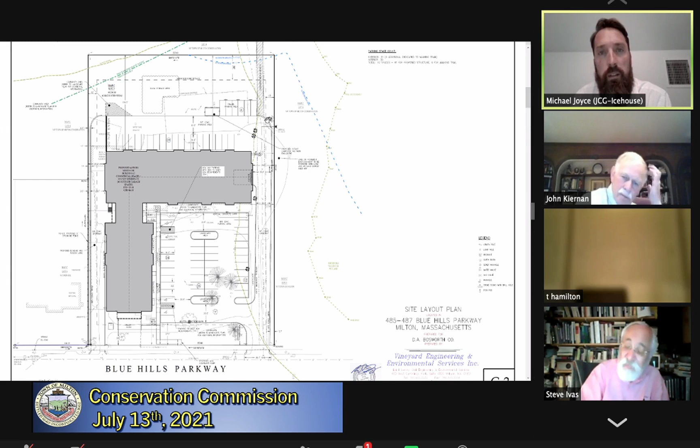We'll also have signs indicating that they're for trail use only at the rear of the property. And there'll also be this walking trail 200 feet out that connects to Pine Tree Brook and the path that runs parallel to that brook. There's a site plan further on that I'll show that shows the full connection to the brook.

In addition, we're now providing two 10-foot wide landscape areas in the parking area. We've graded the site such that we don't need a retaining wall here. Overall, I think it incorporates a better feel to the entirety of the property — it keeps it more open.

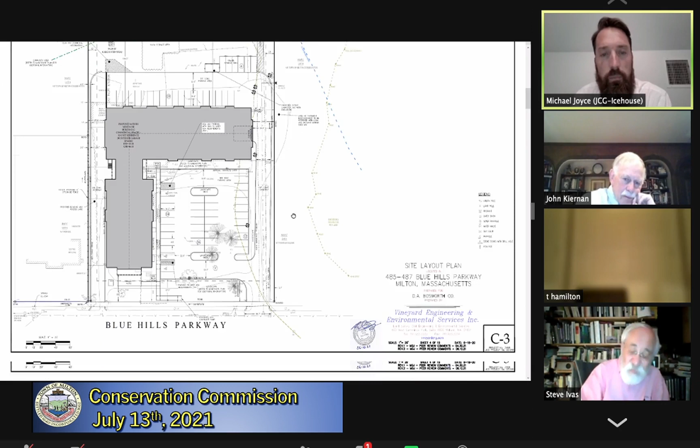The rooftop runoff is collected by virtue of roof leaders around the entirety of the building and outlets to the stormwater retention area in the rear. The rear parking areas sheet flow to a sediment forebay, ultimately go to the stormwater retention area, which overflows to a similar control structure as we had in the original design and ultimately flows out of the site. The main driveway area has been expanded to allow fire access around the entirety of the building and also to provide for that parking in the rear.

We've included pedestrian walkways to the sidewalks from the site, which was also an improvement made through discussions with the zoning board. Overall, from an access standpoint, we still maintain the 2 curb cuts.

And really our impact to the resource area — we haven't gone any closer than approximately 45 feet to the bordering vegetated wetland here with our proposed work, with the exception of some of the remediation work that John Zimmer is currently working on a plan for, as we've discussed throughout this project.

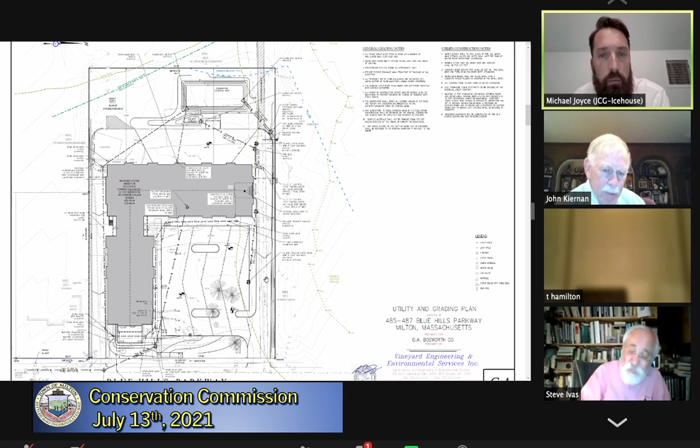This is a zoomed out view of the proposed pathway with a cross section. It's an 8-foot wide proposed path with dense grade gravel, extended from the parking area out 200 feet to Pine Tree Brook. We've located it over the existing 10-foot water easement, so it serves two purposes: it keeps the water easement clear, and it provides a delineated walking path to Pine Tree Brook.

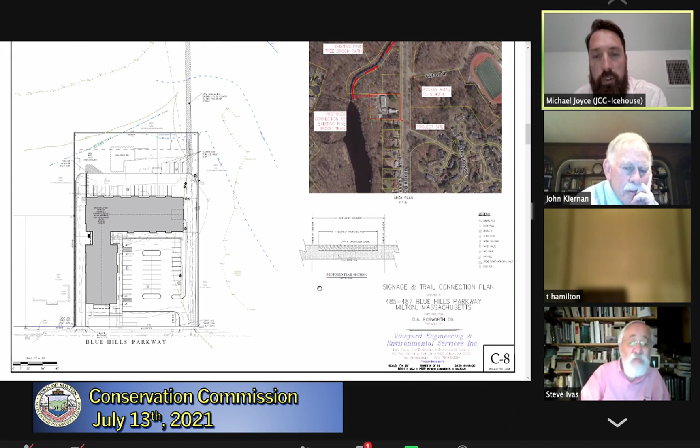We've also engaged Verdant Landscape, as Attorney Brodsky mentioned, and they've put together a comprehensive planting plan, shown here, consisting of plantings within the landscape buffer. I believe the majority, if not all, of the plantings now have been revised to be native species. We've also provided erosion control mix in the resource area, retention area, and lawn in the community area, which the zoning board wanted to see in the rear, and I think your board brought that up as well. So those are the main changes.

I don't want to keep rambling on. I know it's been a late night, but if you have any questions, I'd be happy to answer them.

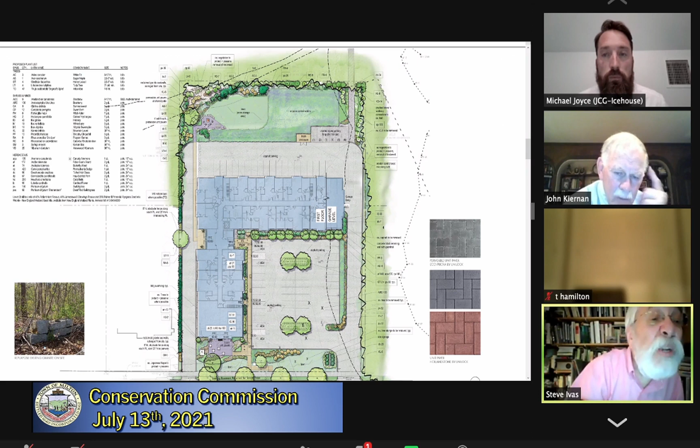A quick one, Michael. I see 3 vegetation types, one each in trees, shrubs and vines, and herbaceous, that are not natives. Okay, so there's one in each type, just to let you know.

Okay, and Kathy, you can probably speak to this better than I can, but I know that in the entirety of the site, not all the plants are native. There are some screening shrubs that I think we selected for screening more than for being native species, but we certainly will have everything within the buffer. The resource area buffers will be native.

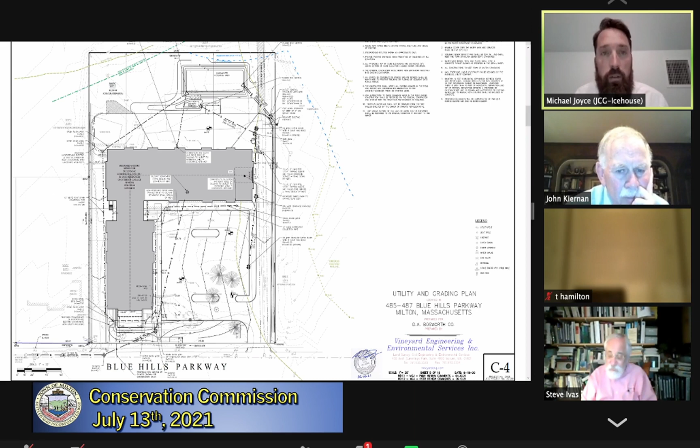In all the storm events, the rate of runoff is decreased for the 2, 10, 25, and 100-year storms. And it's all been peer reviewed by Tetra Tech.

Sean, I'm sorry, I'm blanking on his last name. It's late, Sean Reardon. Mike. Reardon, thank you, I knew it began with an R. Sean Reardon worked extensively on revising the stormwater system.

The nice thing about a system like this is everything is at the surface, so if there are any issues, you know immediately. Maintenance is a little bit more straightforward. If you see sediment building up, it's not something where you have to get a jet truck in to run it through the stormwater chambers. You can just mainly dig out the sediment, so to speak, and dispose of it properly. So you can get ahead of any issues that may occur earlier than if they were subsurface.

Well, I know the purpose of the retention pond is to slow it down and allow recharge over an extended period of time. But I'm looking at a building area that's pretty significant in terms of impervious surface. I'm looking at the front parking lot and the back parking lot, and it looks to me like everything's going into this retention pond. I understand what you said, that on the 2, 10, 25, 100-year storm there's a net decrease. Is that correct? Yeah, that's correct.

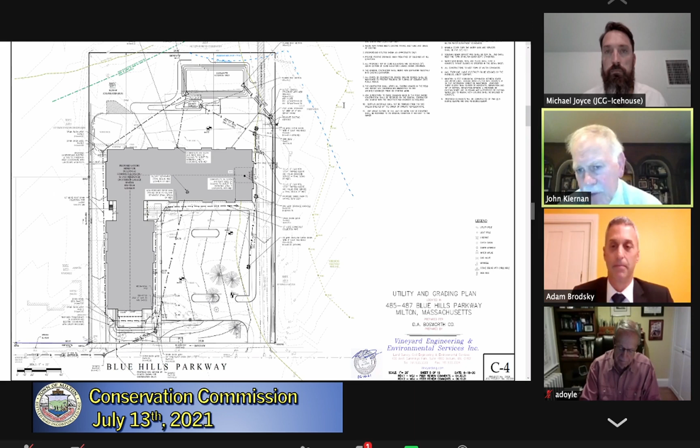That's good. And if there are no other comments from commission members on the design reviewed tonight, then we could continue this matter until—do you want an August date or a September date? I think even when the ZBA closes their hearing, they're probably not going to come in with a permit decision for a month or so. Is that correct? That part of the schedule is a little unsettled.

If I might suggest, perhaps if you give us an August date and we're not prepared to move forward, we can notify you ahead of time and ask for a further continuance. That probably makes good sense. So why don't we set it, Steve, for the August 10th date? Yes, and then if need be, we can continue it until September. Make sense? Any other comments, questions or concerns?

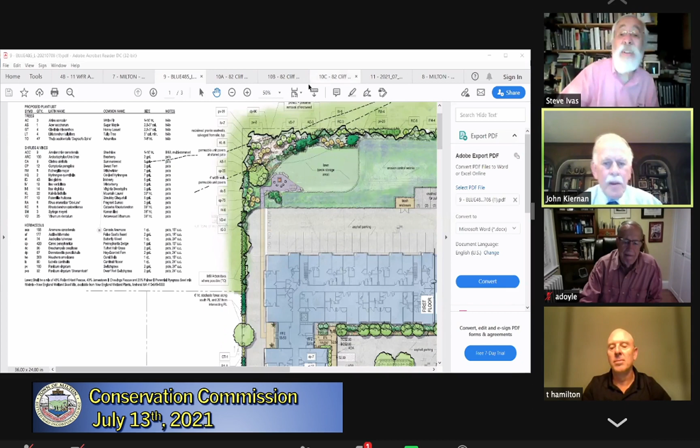Okay, next on the agenda is the enforcement order at 82 Cliff Road. Let's see, 82 Cliff. Yeah.

Thanks, Steve. I'm looking at my screen. I don't see Mr. Powers. Are you there? I just can't see you. I think you're there. Yeah, we're here. Oh good, perfect, thanks. All right, there may have been some confusion, and I'll tell you right up front, I apologize if I've contributed to the confusion, but let me give you a little bit of recent history.

Traditionally, what the Conservation Commission has done, when there's evidence of a violation, is issue an enforcement order. Then after inspection and hearing, we have traditionally requested that a remediation plan be presented via a notice of intent, which is the traditional way where an applicant comes in and says what they'd like to do. It follows the course of the filing of the notice of intent, and after discussion we would then issue an order of conditions.

The order of conditions is appealable by any party, neighbors, abutters, or a member of the citizenry. That appeal would go to the DEP for an administrative review, and then later an administrative hearing if necessary, because the DEP can issue what's called a superseding order.

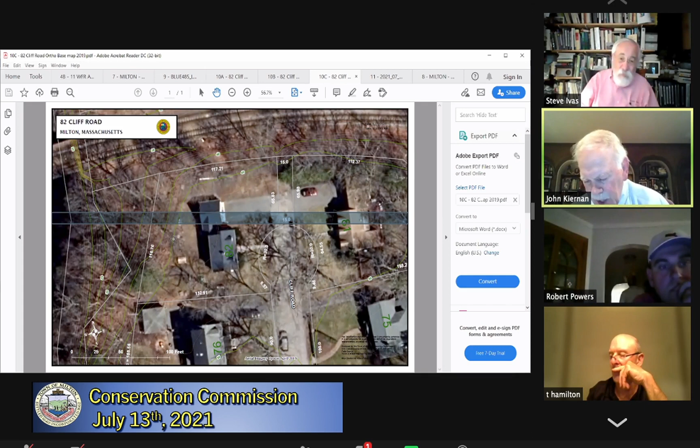Well, that's part of what we need, because we need to establish where the former top of slope and the present top of slope are, I'm reading from Kathy's email. We need to see that difference. The next item is the slope is now a 1-to-1 slope down to the river. The slope elevation needs to be 2-to-1 to prevent erosion and sedimentation into the river after significant storms.

The next item is that the location of the river's bank, the beginning of the riverfront area, is within the 100 and 200 foot riverfront area. That's obvious from what we're looking at here. And then the last point is the size of the riprap stones to be placed at the location of the erosion controls on the slope.

What she's asking for would be part of, she said notice of intent, but I'm correcting her, and I've made the same mistake, that it would be the remediation plan for the enforcement order as opposed to a notice of intent. But the components of it are still there, and that's what's in the email she sent to you last week.

So my question is, can you get some assistance and have somebody draw this out? I wasn't being facetious when I said it can't be on the back of a napkin. It has to have some professional component to the design plan. But we really should move on this, because you've seen the recent rainstorms, and these are pretty significant rainstorms, and that slope is going to wash to the river.

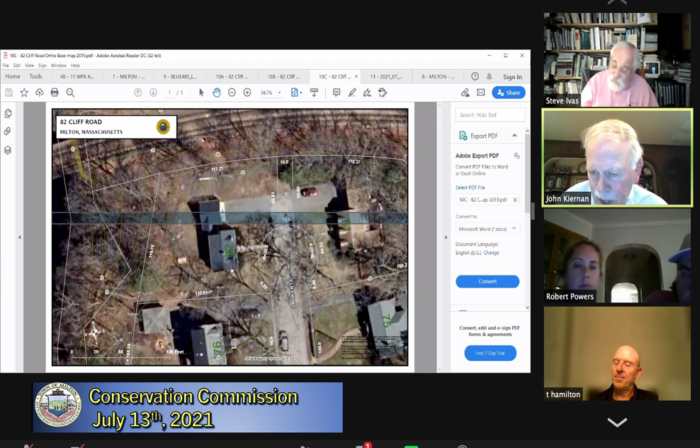But that one is called DBH, which is diameter at breast height. And actually it's circumference at breast height. But we look for the sum of the trees taken out. So if you took out one tree and it had a 30-inch circumference at breast height, then you'd have to replace it with 10 trees at 3 inches, or 2 trees at 15 inches, or 3 trees at 10 inches.

The sum has to equal. So you take the circumference of the tree you're removing, and then you create however many trees you want to replace it. So typically people will buy trees at 3 to 4 inches of circumference. That's actually a diameter, I apologize. I just changed on you from circumference to diameter. But most people will buy a tree at like 3 to 3.5 inches, maybe 4 inches of diameter for replacement purposes.

And somebody that's better than math can go from diameter. I know it's pi something or other, but you can go from diameter to circumference and figure it out. But there is a performance standard that we've applied that I know of for the last 29 years.

Sorry, this might be a silly question, but for that calculation, is that 3 to 1? You take out a tree, you plant 3, whatever calculation that is. Does it have to be on your property, or does that go just somewhere in Milton?

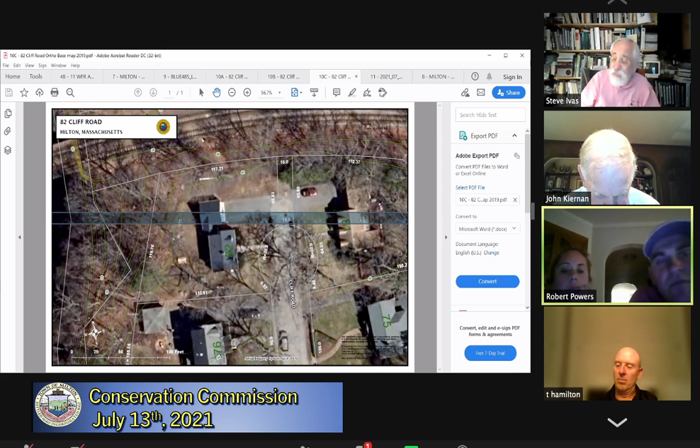And we all stood there and looked at it. I mean, I could show you 20 trees that are buried like that on the hill, all the way down the street, even in front yards down the street. So, yeah, that tree is pretty important because it's holding the slope.

So I don't know if you have any questions or if you want. Well, if I have questions, will Kathy answer them? That's like the problem, I can't wait a month to get a response.

I think that's a difficulty because we didn't get that email with everything in there until last week. So now we're going to move Friday at 3 o'clock. So now we can move on this, but it's just hard if we have questions in the meantime. Like, who can we reach out to that can give us an answer that is consistent with what you guys are thinking of, and not telling us to do a notice of intent.

Because I thought he negated all of that, John Kiernan negated all of that last meeting. So I think that's where we're just a little bit confused. So it would just be helpful to have a direct point of contact that knows what they're talking about.

You can call me. Okay. All right, I think you've got my email. If you don't, I got yours and I'll respond to you. So you'll have mine. Thank you.

But, in fairness to the commission, we did discuss with you the very first day when we were out at your property that you would need a plan to unbury the tree. When you were here, you said I could start digging, and you had marked with your foot like a proposed height for the top of the slope. It wasn't talk about a written plan or anything like that. That was new at the last meeting.